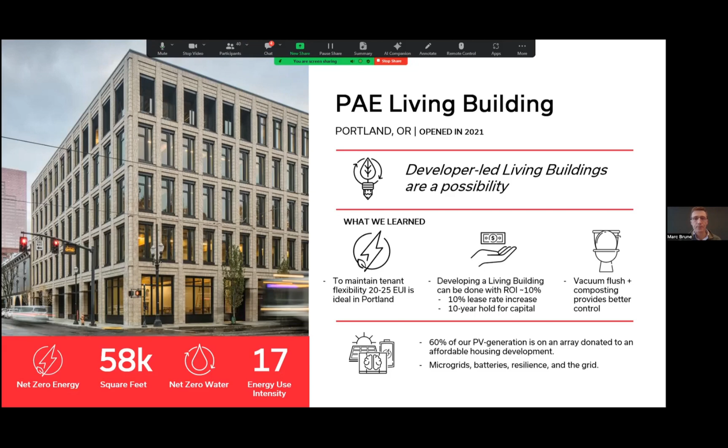The team that did it was ZGF as architect, KPFF for structural, Brightworks to manage the Red List, which is a component of the Living Building Challenge, Biohabitats for our sustainable water systems, Walsh Construction was our GC, Edlen & Co. was the development partner, and then PAE led the mechanical, electrical, plumbing, lighting, technology, and energy systems. And our offices are now on the 3rd, 4th, and 5th floors of this.

I mentioned the Living Building Challenge. So our goal was full certification for all 7 petals. So place, water, energy, health and happiness, materials, equity, and beauty. We're currently in our performance period. We actually just completed our performance period and we're finishing the documentation now. So hopefully by the end of the year, we're actually officially certified. You have to prove that performance for 1 year.

We had coined an unofficial 8th petal, what we called net positive financial. And this was really a nod to the developer-led design that we had and the pro forma that we had to meet. Our building had investors who were expecting about a 10% rate of return on the investment. And one of our hopes with this project was to show that a Living Building Challenge compliant project can be just as financially sustainable as it is environmentally.

And I think one of the interesting data points now is that sort of post-COVID, we are 85% leased out, which is much, much better than a lot of buildings downtown. So I think it speaks to the value proposition of Living Building Challenge that we have found for ourselves.

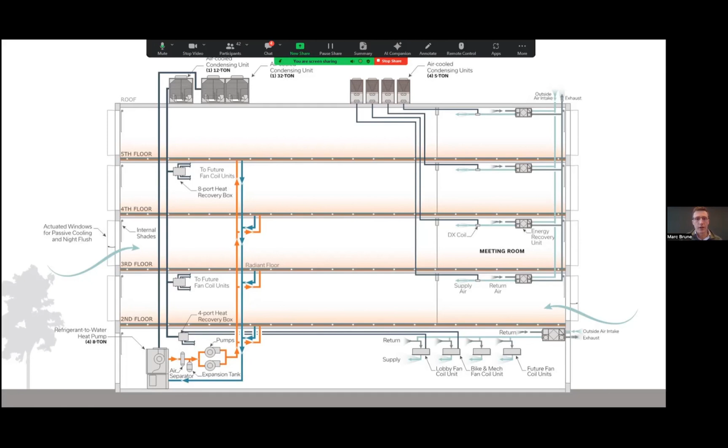And all in all, like I said, we use about 16, 17 kBTU per square foot per year to operate the building. So really low, but with a little bit of a gap, and we needed to fill that gap to generate enough energy to meet net positive energy operation. And the way that we did it was with this partner array that we had.

Our general contractor, Walsh, was constructing another building in Portland. It was an affordable housing building, and we were able to make an arrangement with the owner of that, Reach, to donate an array to their project to meet the additional solar that we needed on ours. So we have these two arrays, one on site on the PAE Living Building and another off site at the Reach Renaissance Commons. On site, we use a battery and a microgrid to manage the power backfeed and stay within that 50 kW limit that the utility set for us.

Limits like these, by the way, are really common in downtown cores throughout the country. So it was a good problem to try and figure out a solution for. And our design is to use a battery and charge it when we have more power than we can backfeed. And then when we're not generating power, at night for example, to slowly discharge that power from the battery back at a rate that's within the backfeed limit.

If our battery can't accept any more power, then the microgrid curtails the solar. That is, it shuts off some of the solar panels. It just kind of opens the circuit on those, and that limits our PV production. And I say that and remember that because we'll get back to it. It is definitely one of the lessons learned that I'll get to here in a couple of minutes.

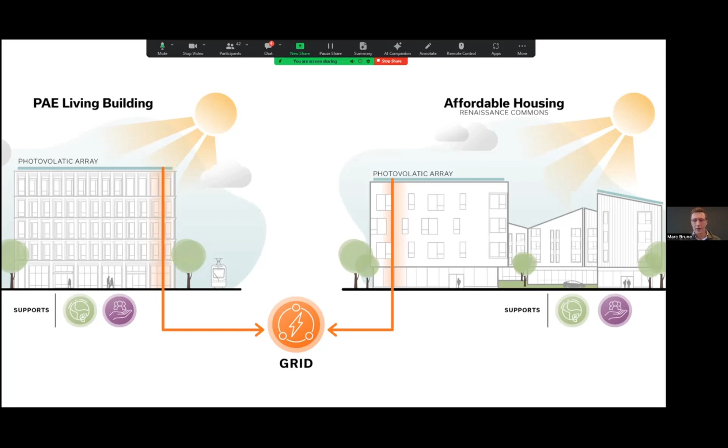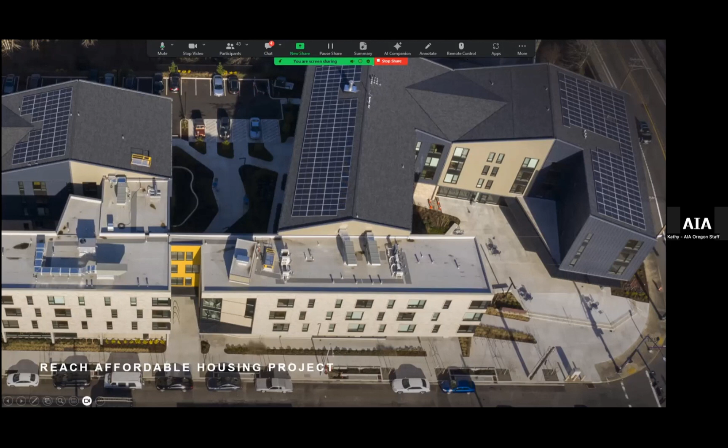Mark? Yeah. There's been a question. Your screen sharing, that little bar across the top is kind of in the way of some of the images. Is there any way you can move that? Maybe. If you can't figure it out, then it's fine. But I just wanted to see if there was a way that you could move it so people could see the full. Does that look better? Perfect. Yes, it's gone. Okay. Thank you. Yeah, thank you.

So this is the Reach Renaissance Commons, and this is our offsite array that has a 215 kW solar array. It produces more than $20,000 worth of electricity every year, and it's worth about 12 EUI points. So between that and the one on site, we get about 20, 21 EUIs worth of power production. And the interesting thing about this is the Reach Renaissance Commons keeps the value of that energy. So that $20,000 is essentially a donation to them every year through the PV operation.

And we wrote a contract with them that they retire the renewable energy credits on our behalf. And so then at the PAE Living Building, we purchase renewable energy from the grid for whatever the gap is that we aren't generating on site, so that net there's enough renewable energy for both projects to legitimately say they're using renewable energy. And this kind of met the intent of the Living Building Challenge, provided Reach a really nice benefit, and got us enough solar to get to net zero energy operation.

Let's see here, if I can get this to advance. There we go. One more slide on systems, then I'm going to jump into performance here. I just want to make sure I get everyone oriented. So this is our diagram of our water system. So imagine you're a drop of rain and you fall on the roof of our building. You're going to run down to the storm drain and you're going to end up in our 71,000 gallon cistern. From there, you will be treated through filtration, UV, some chlorination. The rain gets treated to potable standards and ends up in the drinking water fixtures.

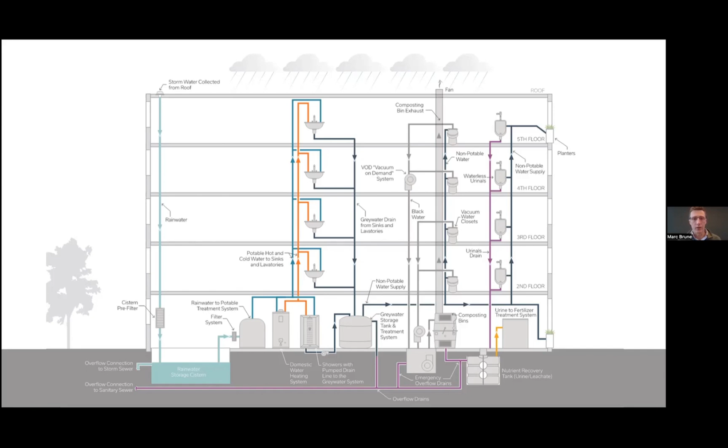From the urinals, it's a hybrid waterless urinal that flushes once a day. It ends up in the nutrient recovery tank. It gets processed into fertilizer, actually, and that fertilizer is now available at garden stores here in Portland. So that's roughly our water system. I'll get into how it's been performing here in just a second.

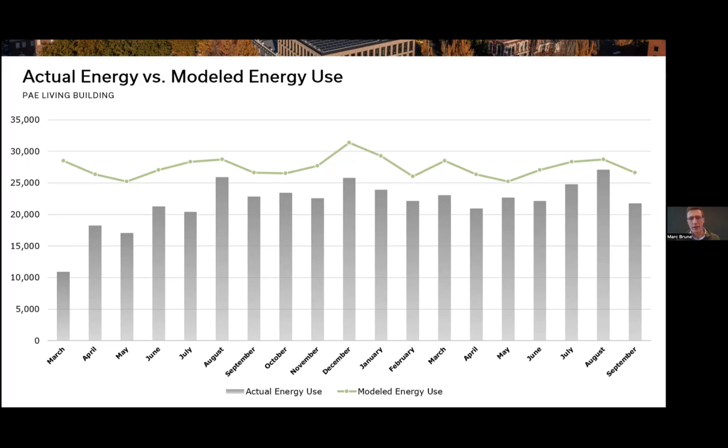And that effect of the occupancy is pretty modest because we're still heating and cooling all of the space. We're still lighting the space. So it's really just the laptop plug load that isn't showing up in the space that's creating the difference.

This slide shows the annual production of the offsite array at Reach. And you can see it's really close to what we anticipated. The overage that you see, so the yellow bars are taller than the green line, is because we actually added a few more panels right at the end of our design period because our predicted EUI was creeping up and we wanted a little bit more safety factor. So I think the production is actually really, really close to what we had expected.

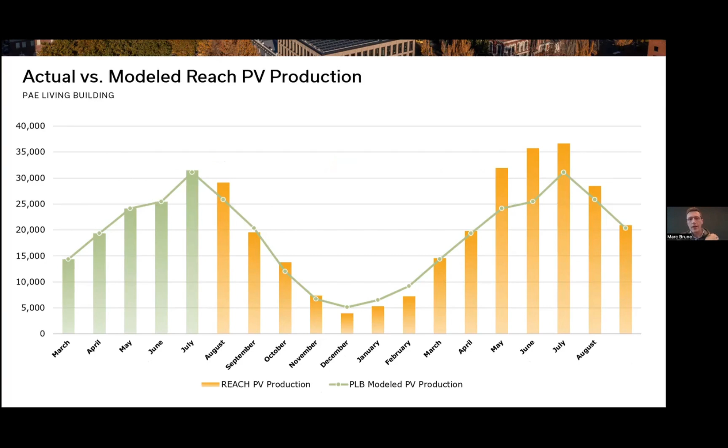So that's the good. It's a different story here at the PAE Living Building, where we've had some pretty significant struggles getting our array and our microgrid fully operational. And the trouble in our case had to do with that utility backfeed limitation. Our battery system, once it was installed, had a hardware limitation that we didn't know about in design, and it could not meet the utility requirements. And so we were set into that curtailment situation where we're having to turn off some of the solar.

And to compound that problem, the microgrid system communications were pretty slow at first, just because it was going through too many different components of the system to closely manage the building's really dynamic loads and the PV power input. You can imagine all that stuff's changing pretty quickly and dynamically, and we needed to stay under the 50 kW at all times. And so the system was kind of over curtailing our PV.

And so our engineers were literally trying to reprogram this thing and helping the contractor team get this figured out. And in July of this year, we finally got the communications issue solved, and you can see our performance bumped up quite a bit in July. So July, August, September, we're starting to do a lot better because we're curtailing a lot less. And as we speak, right now downstairs, there are battery upgrades in process. The battery system is being switched out.

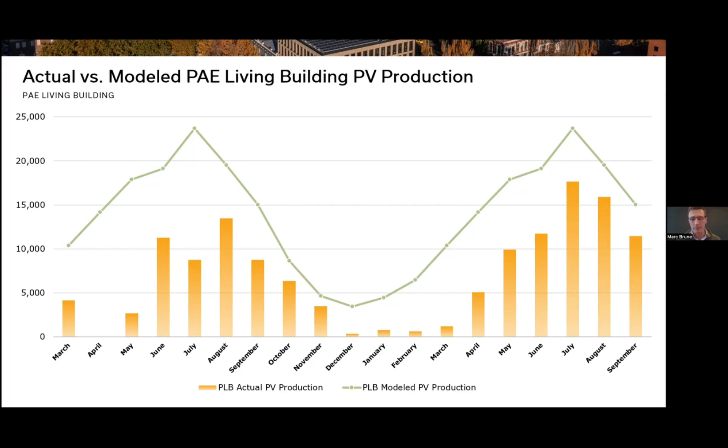So we expect probably by January, we're going to have the yellow bars touching the green line because our battery will be fully operational. The good news is that we had enough safety factor built in, and our energy use being lower than anticipated, that we're still achieving about 110% net positive operation for the last 12 months. So the big lessons learned here are, safety factors are really important. We wanted a 10% safety factor. We ended up with about 5%, but it was enough to get us there.

And then lesson number 2 is that the microgrid and battery systems right now are cutting edge, maybe bleeding edge technology. They're bespoke systems, and they take a lot of commissioning to make work. So don't underestimate the commissioning on that.

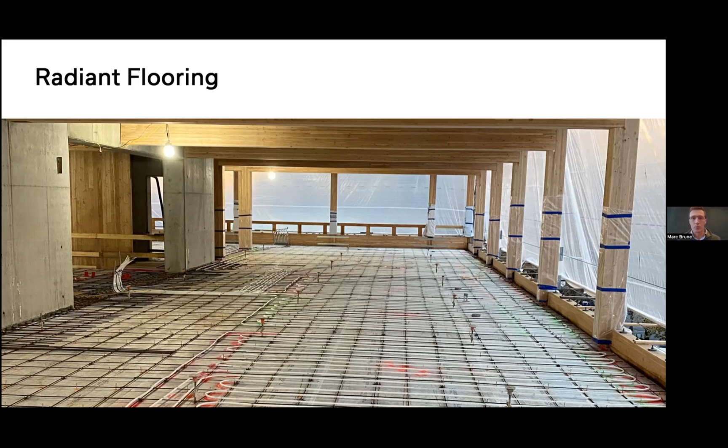From the thermal performance side, the radiant floors are working really, really well. The design concept with this is for really low loads on the envelope, near passive level operation, really. And then we heat and cool almost all of it from the floor. We want the floor to do all that heavy lifting. And that combination of super low loads and the even heating and cooling that we get from the floor has worked just really, really well. It's been super comfortable in the winter, in the summer, and in the shoulder seasons.

One anecdote: we had a zone where the control wires actually got disconnected last winter, and there was no heating for several weeks, might have even been a month or so. And we found out not because anyone in that space complained, but because we were doing an audit of the spaces with a thermal imaging camera, and we saw that the floor was off. So it was just interesting to see that the building is tight enough, it has enough mass, that you can turn the heat off and no one even notices for a while.

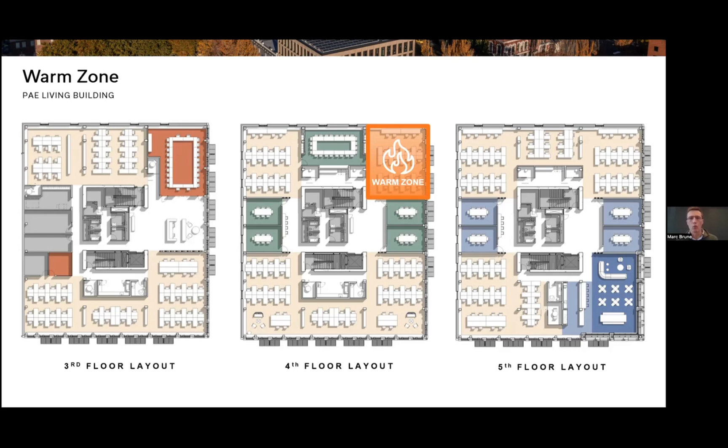The street noise gets kind of bounced in from the awning also. I think maybe a casement window might have been a little bit quieter for our sort of downtown location. From a passive cooling perspective, we have relatively few of these automated windows, maybe 1 or 2% of the total wall area, and it is plenty for passive space cooling. We do a night flush with it, works really, really well.

One of the things we didn't incorporate into the automatic window system was an air quality sensor. I think SERA's office actually has air quality sensors on them. If I was going to do this again, I would build that into the sequence of operations to have the system automatically keep the windows closed if it was smoky or air quality was poor. Right now, we just have to go in and do that manually.

Moving on to the water systems. Generally, these systems have been working really well. The vacuum flush system uses about 1/10 of a gallon of water per flush. That's about 10% or even less than 10% of a typical toilet. It's been really pretty problem-free. It's been easy and comfortable for people to use. I would say the vacuum flush has been a total success.

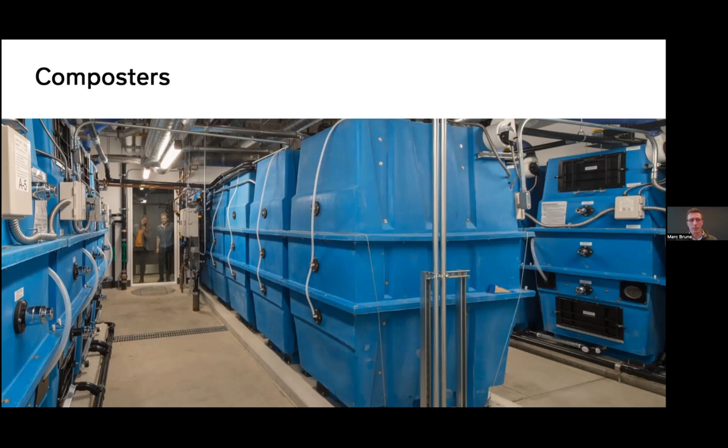You can see here, we actually ended up putting some insect screen on the servers that are in the room because they were literally getting into the computers. We had bugs in the computers.

The nutrient recovery system is working well. You can buy this product now at Garden Fever, at Portland Nursery, and a couple other garden stores around town. It's ODA approved and has been a pretty fun process to be a part of. I have a bottle of this sitting at home waiting for my tomatoes next year. So I can come back next year and tell you how my tomatoes did.

So the way that we deal with that, we have filters and we have a UV light. We're trying to treat that to get this water clean enough to where we can use it for flushing. It's only going to the toilets, the urinals, and our irrigation system. What has happened is that the UV has not always been able to eradicate all of the coliform bacteria.

And we think we've isolated the problem to the cast iron waste piping that we're using. It's leaching a little bit too much iron into the water, and the bacteria are essentially hiding behind the little metal particles. And so this week we're installing an iron filter that we think is going to deal with that problem, and we'll be able to get the system up and running.

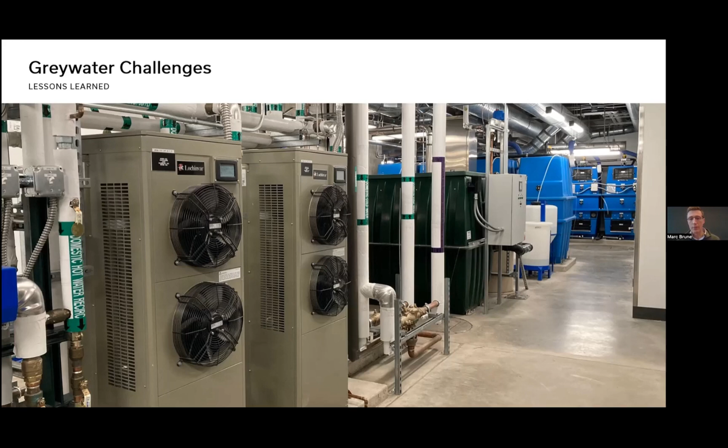On the potable water side, the blue skid that you see over on the left is the rainwater treatment system. I think I mentioned earlier, we've been 100% off of city water since March of this year, and it's been working really well. The water tastes good. I've had essentially no issues with this at all. And it's interesting. So we have a 71,000 gallon cistern. All the rainwater ends up in that.

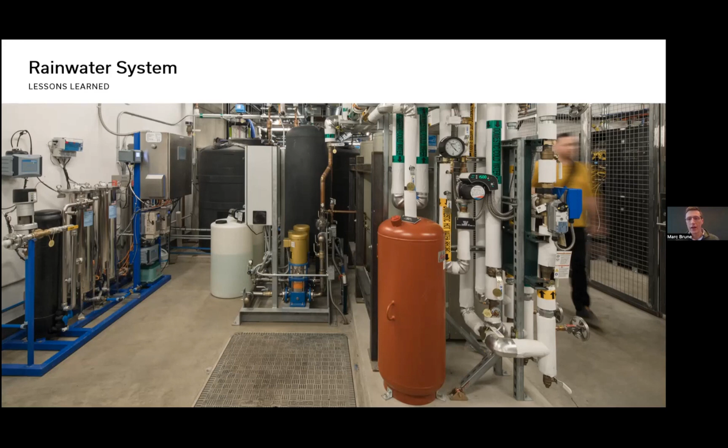And we've been using it for toilet flushing because we haven't had the gray water online. And despite that, we ended the summer with our cistern about 90% full of water. So we were using more water than we expected, and we were still 90% full. So we're feeling really good right now about the amount of water storage that we have. We'll be able to weather some pretty dry periods in the future.

I think we'll hold questions at the end, but I will just close out by saying, we consider this project for ourselves really a tremendous success. Actually, we have learned an incredible amount from being in our own living building and dealing with some of these pretty unique systems. Our staff love being in the building. We've toured, I think, over 3,500 people through, and hopefully inspired them to think about doing something similar.

I mentioned it's over 85% leased out. And, as a mission-driven tenant ourselves, having this building and our physical space really aligned with our values has been a pretty huge morale booster and a benefit that's been strengthening our organization. So, I'm super excited about it.

And with that, pass it off for our next presentation. Okay, thanks, Marc. I'll jump in there. Let's see here. Let me do one thing really fast. And let's see, what was the special trick you did to, oh, there we go. I think it went away.

Okay. Well, hi, everybody. I'm Josh Cabot. I'm a senior associate at SERA Architects. I've been here for almost 9 years. My background is in architecture, but I got my undergrad in architectural engineering. So I have a bit of a structural and mechanical, electrical, plumbing background as well. And then I've worked in construction a bit. So I've done a lot of different things.

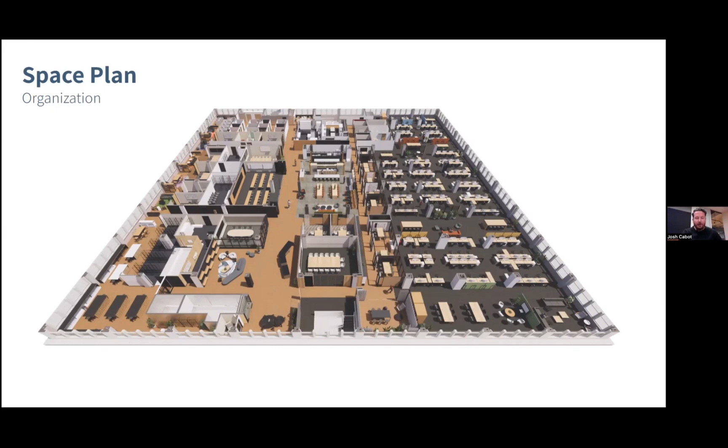It's a full block building, so 200 by 200 feet, which is kind of cool, getting to actually be all on one floor. When we were in Old Town, we were in 2 buildings across 3 floors. We literally had a jaywalk conference room because we were running across Fifth Avenue all the time. And so now we're all together, all on one floor with 4 frontages, facing the outdoor world, which is pretty exciting.

And what we've tried to do is organize it into 3 main zones with focus, really having all of our desk space over to the south side, the social space in the center, because we are on the top floor. So we have benefit of the big skylight; the opening is original to the building. As part of our TI, we renovated and replaced that skylight with new high performance glass. And then on the left side of this image, which is the north side, this is the collaboration zone, with all the meeting space.

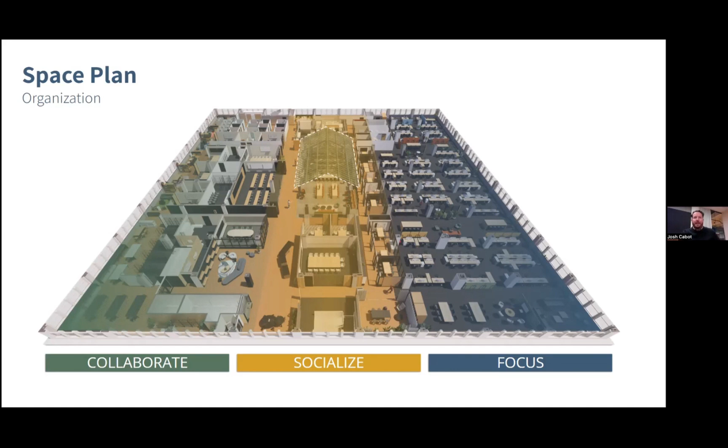And one interesting fun fact: we would often place focus space to the north side of most office spaces because of the diffuse daylight. We opted to flip it in this case, and what we've actually found is due to the Ritz-Carlton and its large facade off to our north, it's reflecting just as much daylight into the north side as what you might find on the south a lot of times. So it's been interesting to adapt to that and think that even though it's facing north, you still do get kind of direct daylight that we have to manage.

One other quick geeky thing I'll mention about our office. So we not only moved to this new space, but we also underwent a total technology revamp as part of this. And what that meant was we did away with all of our tower computers and we moved to laptops only with a centralized, basically server in our office. So it allows us to have these virtual machines. It's kind of weird. So we might have just our email and a web browser and a few light things on our laptops. And then if we need to get into more robust software, we log into our virtual machines.

The cool thing about that is it really helps improve our energy savings. We've now concentrated a lot of the computing to one room in our office where we're cooling it directly right there. It's not towers blowing hot air all over the office. And it gave us a tremendous amount of flexibility to now be able to move around anywhere we want.

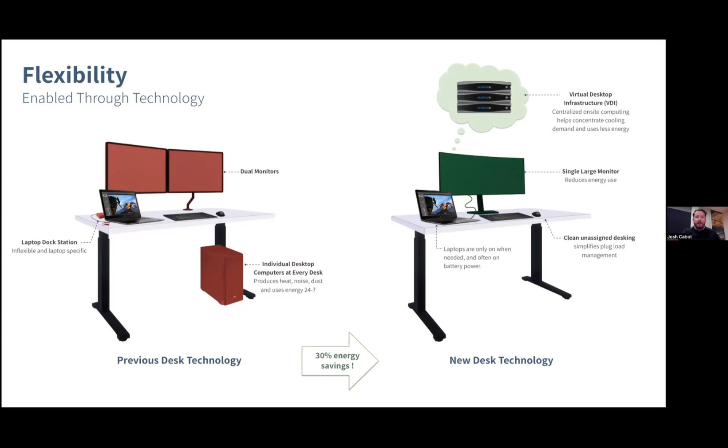So diversity, I think, is such a key part of effective comfort really for people and a good indoor environmental quality strategy. You basically let people self-select. If they're feeling cold, if they're feeling distracted by lighting or by others, they can move to other spaces. And so people kind of are constantly migrating throughout the day to the spaces that help them to find their focus or whatever they need to do in that moment.

So I'll flip through a few images. You might know, we were really trying to push on biophilia and also trying not to make an overtly branded space, something that was pretty natural and textured. You don't see a big SERA Architects logo when you come in. It's really about trying to honor daylight. You'll see a lot of natural plants around the space. We call this spot the back porch, which is kind of the warm-up, cool-down zone off of our meeting areas.

Here's out in the desk space. And then some of the fun areas with our front of house kitchen on the right. And then what we call the social house underneath a little timber canopy. We're very passionate about timber. This is, of course, an existing building from 1910. And so really no timber in this building. So this was kind of our one moment to express that.

So in order to do all this, I'll step back for a second and talk about the building too, because it really helped underpin a lot of what we were able to accomplish up at our office. The Galleria was built in 1910 as a department store. And of course, back then, energy was pretty scarce. Electricity was. And so they obviously put in a lot of passive elements.

We have a lot of glazing, which now, you might say, oh, the window wall ratio is maybe a little excessive. But in fact, we've been able to leverage that to our benefit through passive daylighting. And then that big skylight that used to go all the way down to the ground floor and over the past decades has been slowly infilled.

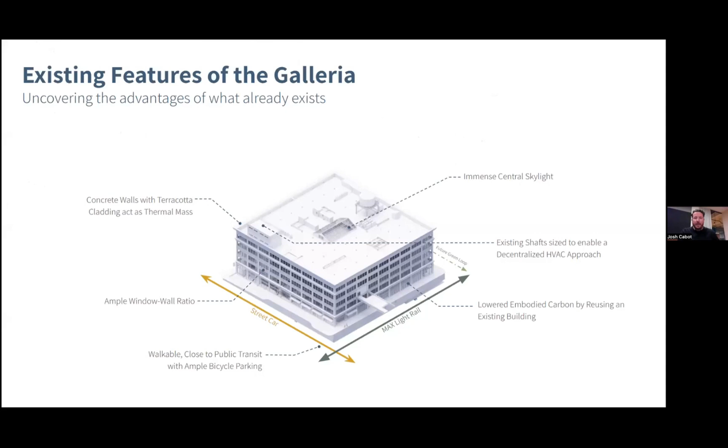It does help to provide a nice social center that's daylit. And just the thermal mass itself, this thing is like a battleship. And although the walls only have an R value of about 3 and the roof had an R value of 8, which we upgraded, the building actually holds on to its energy pretty well. Its thermal inertia basically is pretty high. And so we tried to lean into all of that sort of stuff.

And so the way we went about doing it, one big constraint that proved out to be a real opportunity for this project was that Target at the time was on levels 2 and 3 in the building, and they were looking to relocate to level 1. And as you might know, they've since left the building, which is really unfortunate. But at the time, they needed to have their old store still operational while they were building their new store. And then they needed to just close the door one day on the level 2 and 3 store and open the new store the next day.

So no downtime whatsoever. And that meant a lot of figuring out how could we do a mechanical system that would support this new Target while keeping the old one going with the roof space that we had. And it led us into a very decentralized HVAC strategy, which has actually paid off in a lot of different ways. And one other strategy that we employed along with it was a design for off mentality. Use the thermal mass of the building, and if at all possible, keep the systems off as much as possible.

And so we went to a system where we have VRF up on the roof, so we're all electric. We were able to cut the gas to the building. So now the Galleria is an all electric building. And we distribute the ventilators down through the building. And they're these special heat recovery ventilators. They're actually made in Portland by Ventacity. So each floor has its own ventilators and its own condensing units on the roof.

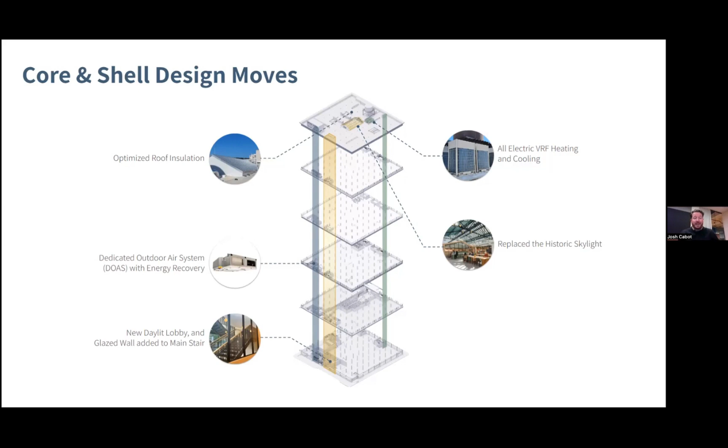And, unfortunately, with the leasing climate in Portland, there has not been new leasing activity on some of these floors. And so we're able to just turn those off entirely. So it's a silver lining to an otherwise tough situation. And then by going with that approach, that actually gave us another opportunity at SERA in particular. Because we have essentially our own system, we were able to invest a little bit further and add in a bypass filter system. And so what that does is we have 3 modes of ventilation in the building.

When we're in blue mode, we have an air sensor up on the roof and a weather station, and it's looking at the indoor and outdoor conditions and says, now's a good time to open the windows. And so we actually kept all the operable windows. We refurbished 25% of them to keep them operable. And then the other 75%, we put in these interior storm windows that effectively made them triple pane. So when we're in blue, it says open the windows. Anybody can open a window if they wish.

When we're in yellow mode, that's just efficient mode. And so that's when the windows need to be shut. If they aren't shut, we have sensors for all of them. Then it will tell our staff to go and shut them, and you'll see blinking lights. And then red mode is when we have bad outdoor air, typically from wildfires. And so when that is occurring, we have this extra bypass filter with a booster fan that kicks into gear and actually delivers MERV 16 air.

It's MERV 13 typically. And so we're taking an energy hit in that moment, but of course, human health is really more important in that moment. And so it's been pretty interesting to see how that's worked out. And we can talk a little bit about how we've commissioned our way through that.

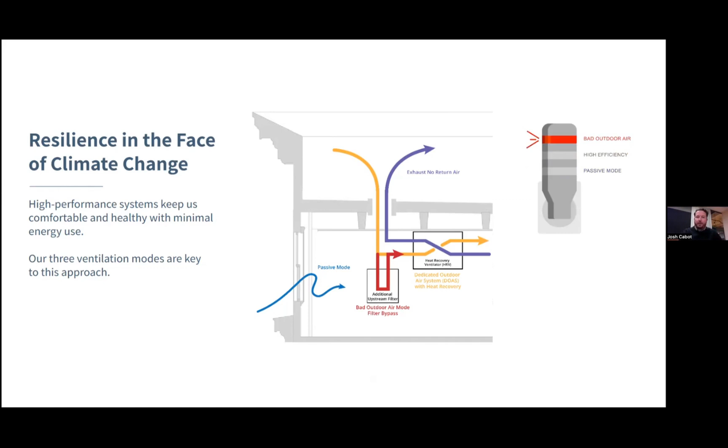So in general, the energy recovery that we deployed was really essential. So even for the building, we were able to show an 80% reduction for the Galleria as a whole. So it's a 113-year-old building, and we're able to pull that thing down from the CBECS baseline in 2003 about 80%, which is roughly 50% better than what code would require today. And then our floor, I should say, SERA follows roughly with that.

We have slightly better EUI on our floor than the building, and that has to do a lot with the triple paning of the windows with those interior storm windows, and a few of the other additional, like demand control ventilation and some other occupancy stuff that we had deployed.

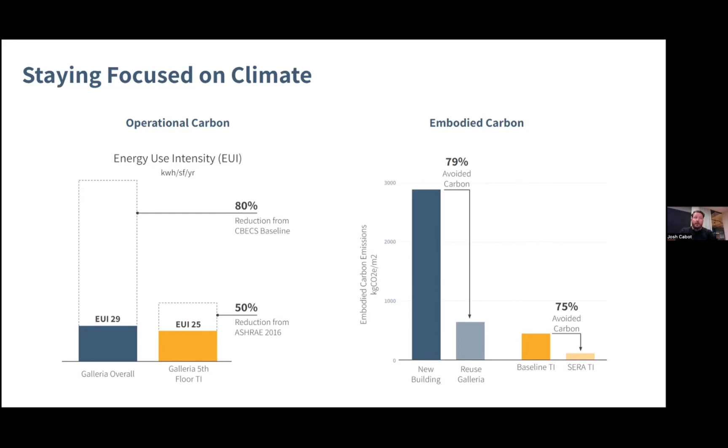Also meant a lot of avoided carbon too, of course, just by reusing the Galleria as a building itself. But then in our own TI, the avoided carbon really came from making some conscious choices around flooring, going with a lot of natural materials, going with low carbon drywall, and a few things like that.

So when we look at the Galleria core and shell, we were able to align that. I need to update this slide because we found out just a couple of weeks ago that we're able to actually get LEED Platinum for the building. And we've aligned to the 2030 challenge by meeting that big 80% reduction off of CBECS, which aligns to the Architecture 2030 challenge. That put us on the path to net zero with Energy Trust.

So Unico received a $500,000 incentive, which really helped to offset some of the costs with that mechanical system. And it's Fitwel 2 stars. Then up in our floor, on the 5th floor, we were able to take that also LEED Platinum. We've confirmed that. And we're still in pursuit of WELL Platinum.

We're pursuing 4 of the 7 petals in the Living Building Challenge, including the Materials Petal. And we're entering the performance period for WELL and LBC here in the new year. And then also looking at ILFI Zero Carbon, which we've been pursuing basically because we're an all-electric building at a low EUI, and then we're offsetting the rest through community solar.

Interesting thing too, Unico pursued community solar for the whole building, which actually is going to give them a savings over time versus just the regular utility rate. So over the next 20 years, they'll save about $120,000 off of their electrical bill just by pursuing community solar. It's a pretty interesting opportunity.

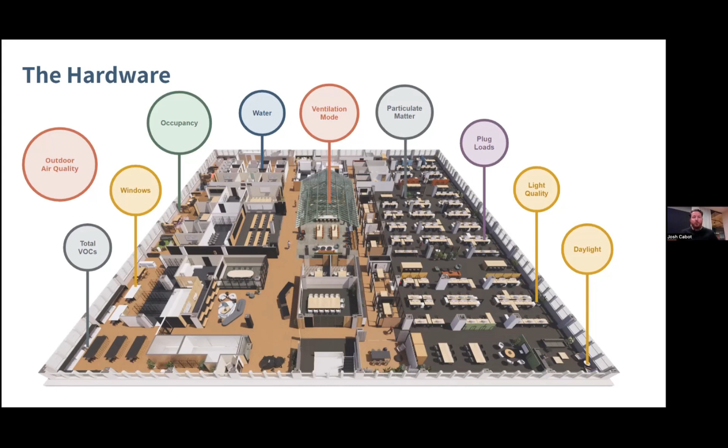And actually, when we took it all into account, there were 38,000 available points of information that we could pull from if we wanted to know it. But it was like information overload, and we needed to be really strategic about what really matters most to us. And I would say this was another lesson learned. You should really be thinking about how you want to intuitively label things and develop a cohesive labeling strategy across all these various pieces of equipment and systems so that things start to really align to each other.

And of course, you want to be able to think about what are meaningful ways that we can visualize this information. And so we've been spending some time with that. We have our building management system where we're able to pull out real-time values or things on 10-minute increments or 1 hour or day increments. But then trying to find ways to make that a little more actionable.

I think right now, one of the easiest ways for people around the office to understand air quality outside is just those indicator lights that tell us when to open windows. But we're working on ways to basically show people the air quality in various portions of the office.